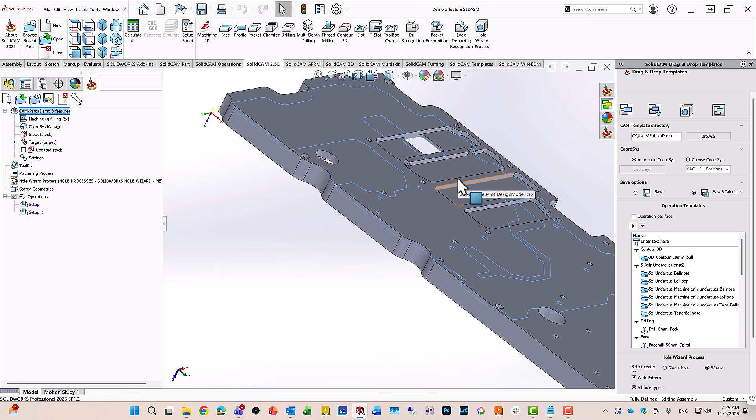Also note that we have very small corners. We have a corner over here that's 2 millimeters in radius. And if I flip this over to the flip side, you can see we even have a space over here where the total width is 3.5 millimeters. So we have to use pretty small end mills.

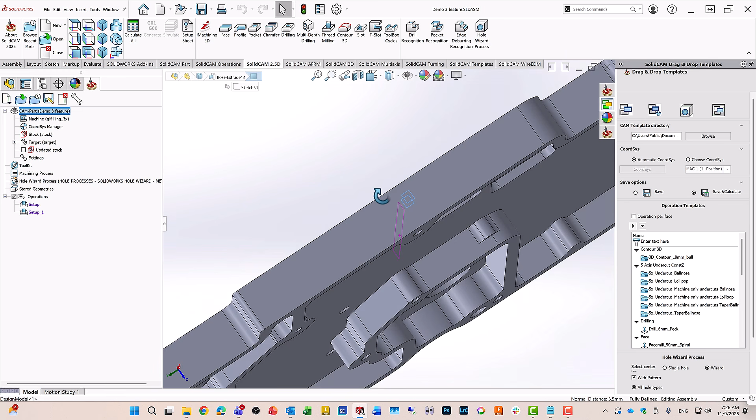Now note, when using small end mills, it's also important to pay attention to the height of the end mills themselves, how much is sticking out of the holders, and to see if it has enough support, because CAM Assist takes that into account when it chooses a tool to use. Okay, so let's get started.

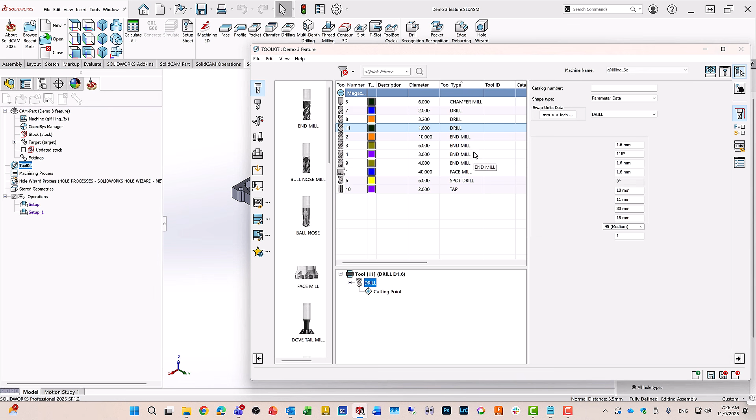Let's first take a look at our actual toolkit, and you'll see that we have a chamfer mill, we have some small drills over here, we have a larger end mill, and then we have smaller ones, a 6 millimeter. We even have a 3 millimeter, a 4 millimeter. And if we take a look, for example, at the 3 millimeter end mill, you can see that this is actually pretty short with a 6 millimeter shaft, giving it more support.

Okay, so let's start running our CAM Assist. I'll right click on Operation and then run CAM Assist. Again, we'll let it run. It checks out what is feasible, and it sees that everything can be machined, no issues detected, and I will be working in metric, so I'll put that to metric. And now we'll go to prepare.

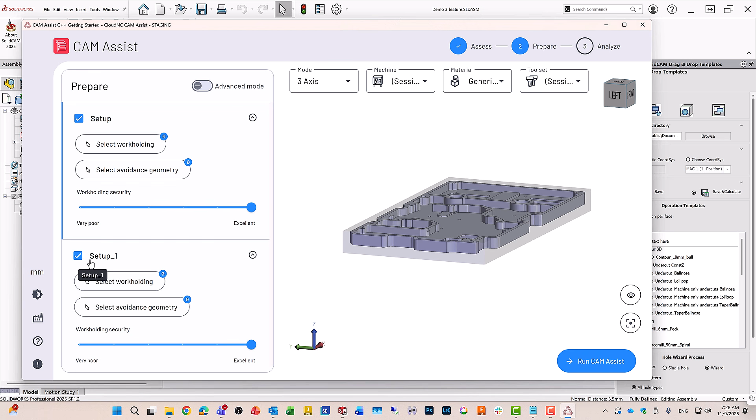When I go to prepare, first of all, it sees that I have two different setups for the part. Also, if I take a look at my tools, all my tools have been accepted. It picked up every single type of tool that I have, including the 3 millimeter end mill with a 6 millimeter shaft. Okay, I'm ready to run CAM Assist.

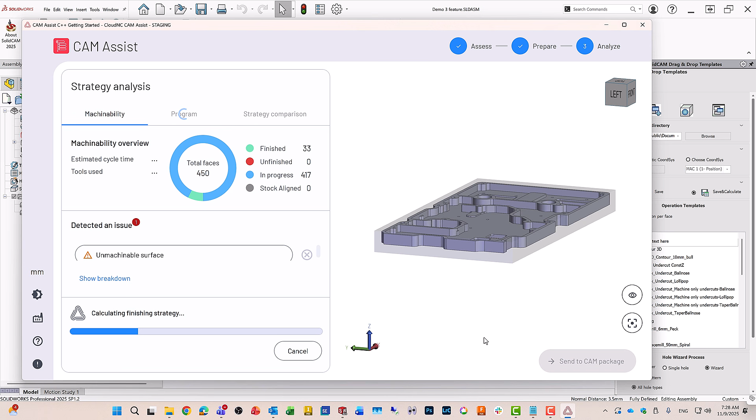As it's running, it's going through checking what strategies it can use, the surfaces that it has, the ones that it can work on, the ones that it can't work on. And what's nice also is that it shows you in the unfinished exactly what cannot be worked on because of the type of tools that you may have. Okay, just to take that into consideration.

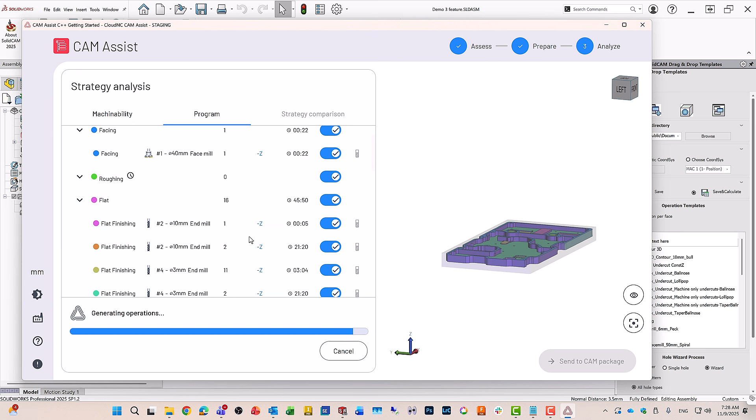Take a look also at the programs to see what kind of strategies it will be using. We'll be using in the first setup facing, roughing, flat finishing, wall finishing, hole making, spot drilling, boring, all these different types of operations. And in the second setup, you can see it's also doing a whole bunch of different types of operations. Okay, all I'm going to do now is send it to SolidCAM, and let's take a look at the operations that it created for us.

You can see it's first going through the first setup, creating the operations for the face mill, iMachining 3D with several different end mills, starting with the larger one and going down to the small one. And we'll see that in a few moments also during our simulation. It's doing all the different pockets with all the different sizes that it may need to finish off, including those corners. It's doing also the drilling operations that are needed, and the counterbore it does with helical boring.

And on the flip side, again, it does iMachining 3D, then the floors, and then it finishes off the part with the walls, and also always deburring those edges. Okay, so everything basically is done. We'll do a quick calculation of everything.

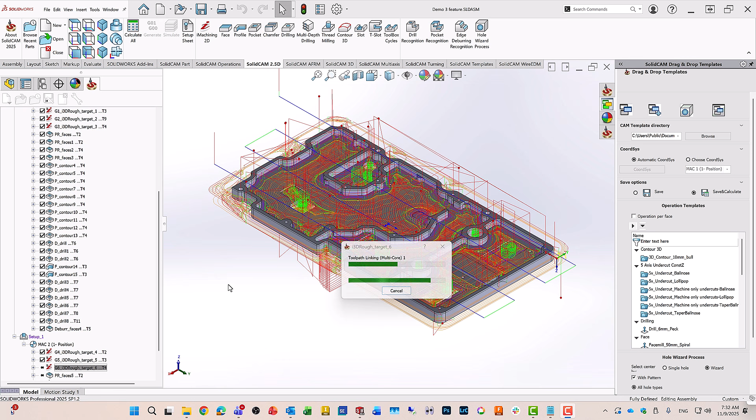And as it finishes calculating, it's now going over to the second setup, working on the iMachining on that side, finishing off the floors, and then also doing the deburring at the very end. Let's take a look at this simulation.

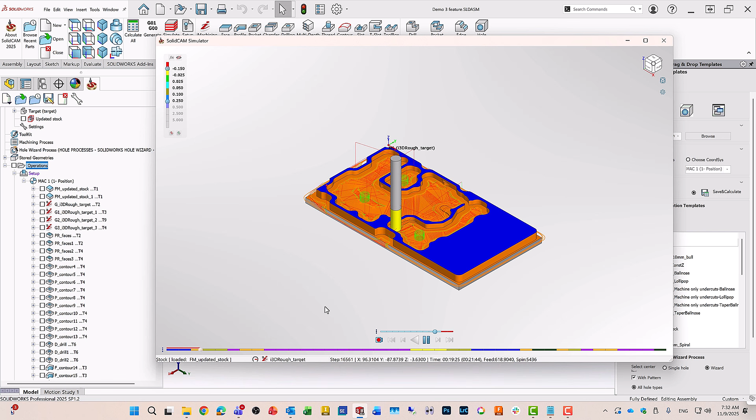And you can see that it first does the face mill, does the iMachining with a larger end mill, with a 10 millimeter end mill that I had inside my toolkit to get out a nice amount of the material. When it finishes iMachining with this particular tool, it'll then use a smaller end mill to get into areas where that larger tool cannot go.

And even after that, it will use a smaller end mill for the really, really small corners that we have in the part. You can see that being done now with this end mill, and all of the corners are machined. It'll then finish off all the faces that need to be finished, also doing with the smaller end mill certain faces that need to be finished in order to get to those corners.

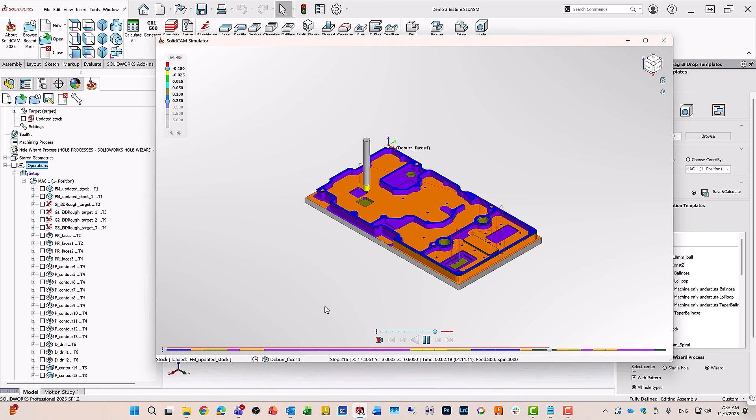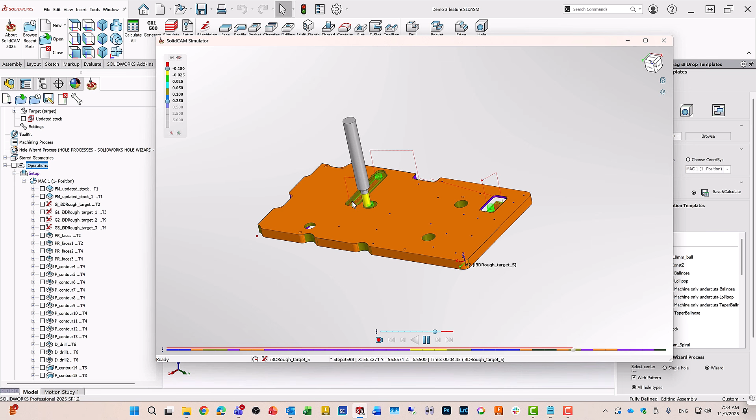And now working on the flip side for setup 2 to finish off all that excess material that's on top, to mill around into those pockets where it could not get to before. Here as well. And you'll note also in a few moments that we had those small areas that need to be machined out. So it will be machined out as well with a smaller end mill.

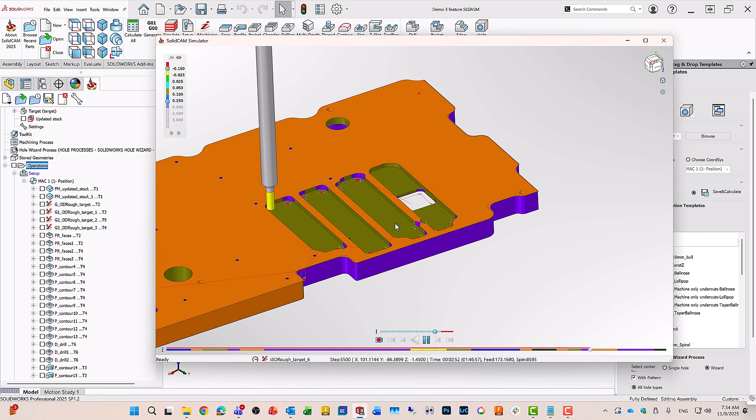As soon as it finishes with this end mill, you can see that this one finished off almost into that corner, and then going with an even smaller end mill to finish off all of these corners, including that area which I mentioned before, which is only 3.5 millimeters in distance from one to another. And there we have it. The part has been machined out.

In our next recording, we'll be showing a little bit more about indexial machining.